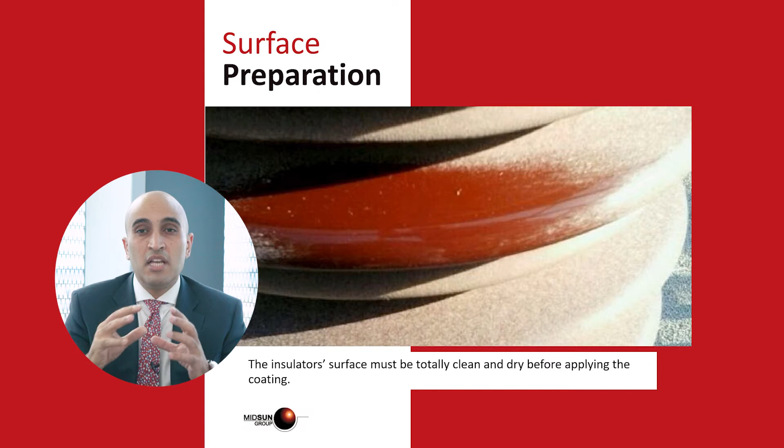The first stage of correct application of RTV coating is the surface preparation. Insulators must be clean and dry. If we have to apply RTV coating, we need to clean the surface of the insulators and make sure that it's 100% dry prior to the application.

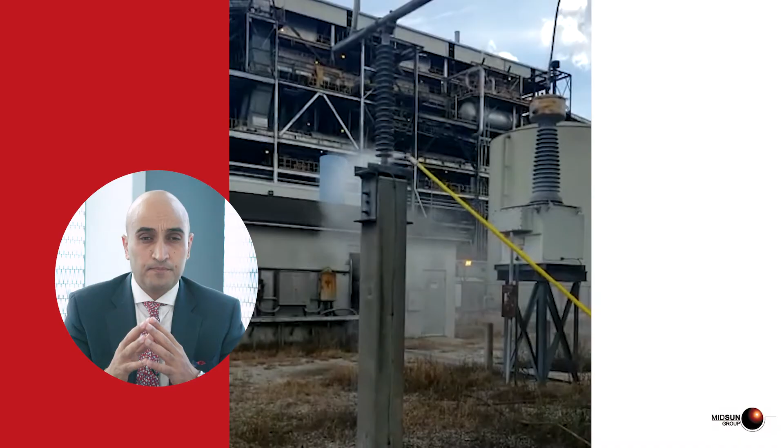For those applications in existing substations, we can use blasting material to remove those contaminants that are very strong. For instance, we can use walnut shell or corn cob or limestone to blast those contaminants before the application of RTV coating. The next stage of the application is mixing or shaking of the coating.

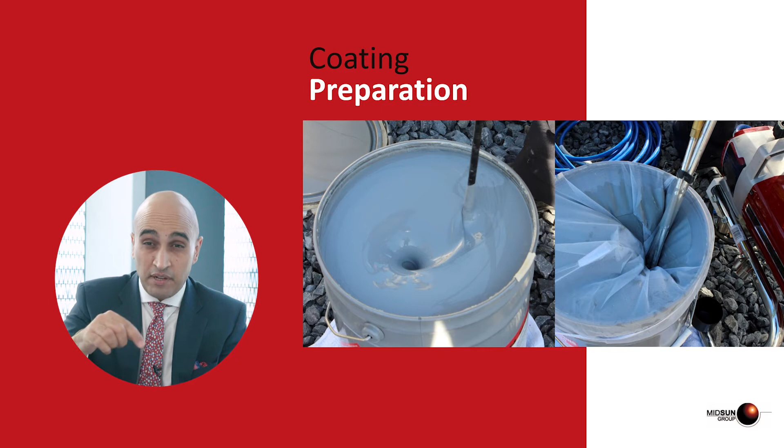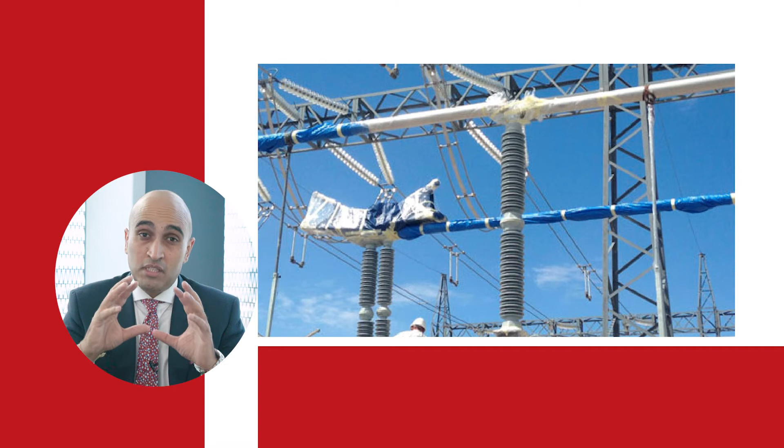Normally the coating in the pails comes with a little bit of solvent, so prior to the application, it's very important to mix it very well, at least 5 to 7 minutes. Then we have to proceed to protect those parts that we don't want to coat. Remember, RTV coating is a highly adherent material, so every time we apply the coating, it will stick. So it's better to protect all those parts that we don't want to be coated with RTV coating.

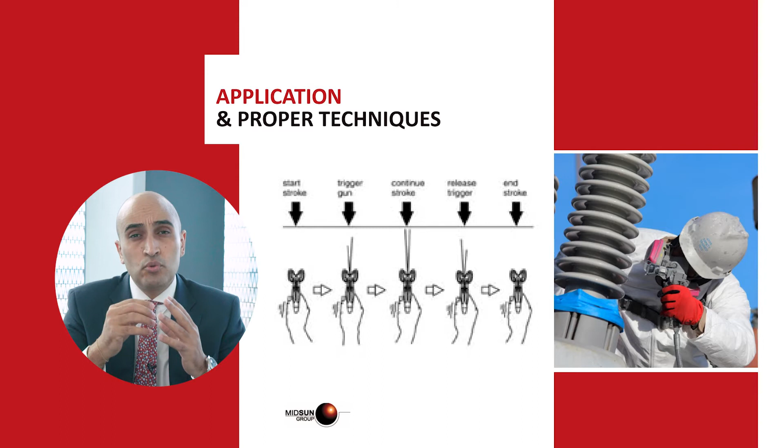And then the application of the RTV coating is like any other paint material. It has to be done smoothly, and for the first layer we have to go very low, so we don't apply much coating, to avoid dripping of the coating. And for cap and pin applications in string, or even for long rod, we always recommend to start from the bottom, okay? Because the bottom part of the insulators is the one that has more creepage distance, so it's the one that needs more RTV coating, more protection.

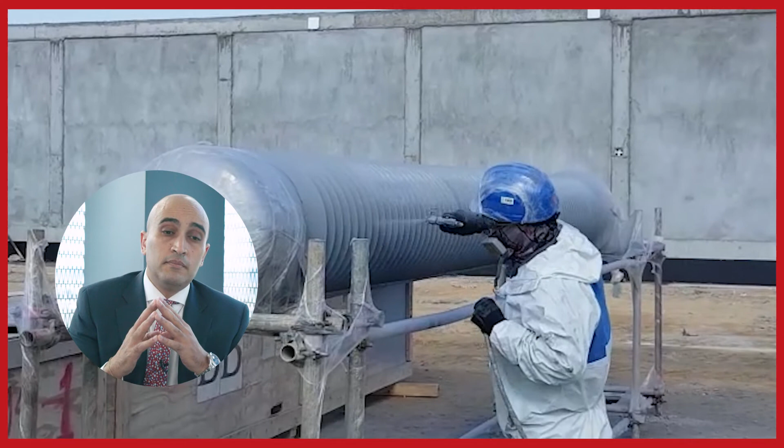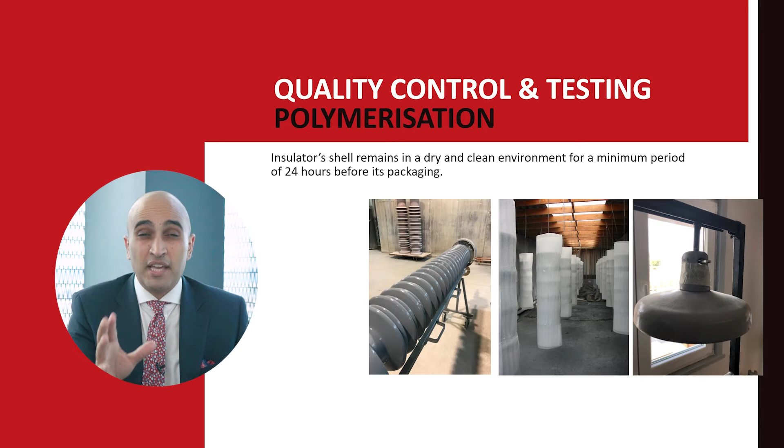If the application is done in-house, meaning for new insulators that will be shipped to a site, we will need to leave the insulators for at least a period of 24 to 48 hours for correct polymerization prior to packaging. This is a really important step to take into consideration.

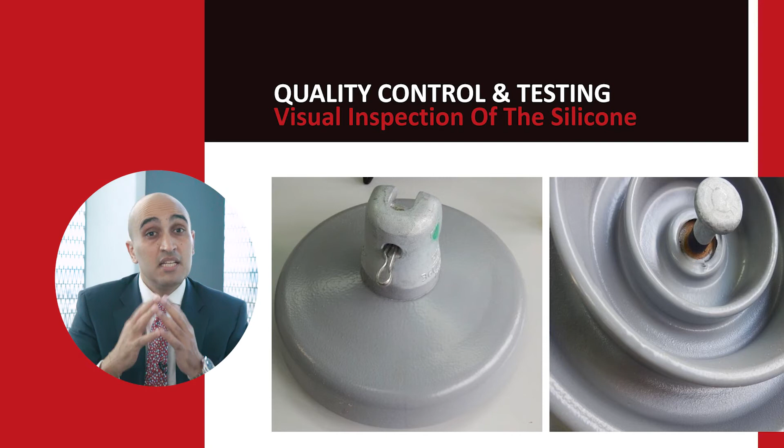After the application of the RTV coating, and when it's cured, we need to proceed to a quality control of the application. The first is visual inspection. We need to make sure that the coating is applied throughout the whole surface of the insulators. There is no white spot, there is no uncoated area. That's an important thing. Second, we need to perform a test randomly on some insulators to make sure that the adherence of the coating to the surface of the insulator is correct.

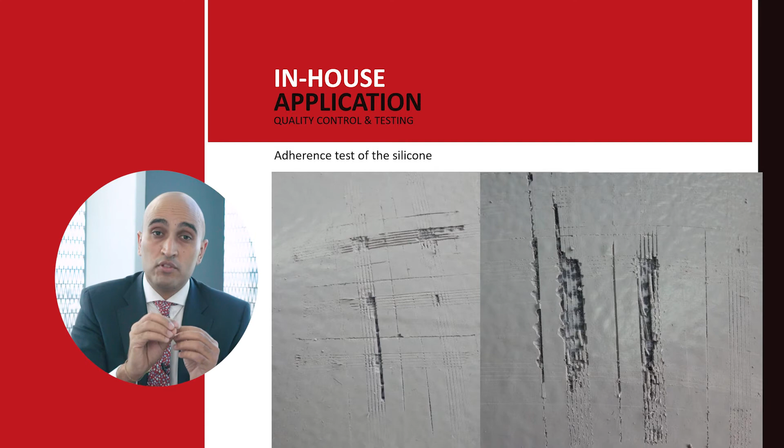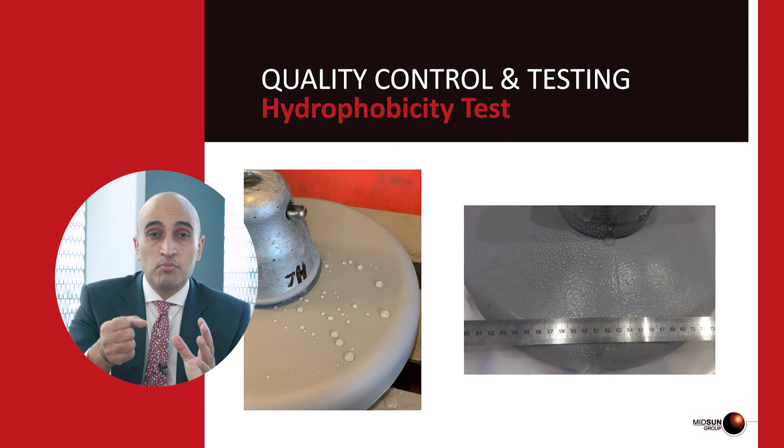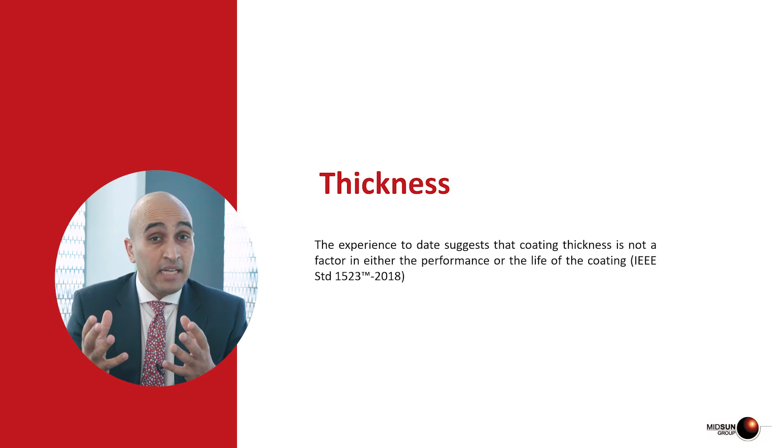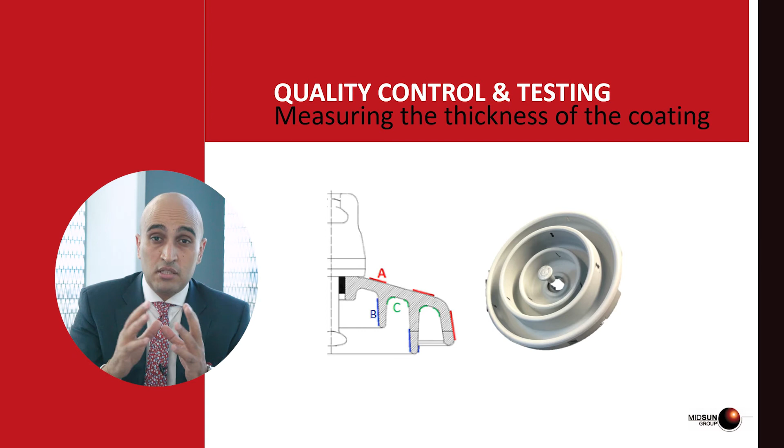Third, we recommend testing the hydrophobicity of the RTV coating. It's a very simple method; we only have to spray water and check the angle of the water droplet on the surface of the insulator. Another feature to take into consideration is the thickness. The IEEE guide of 2018 recommends a thickness between 300 microns and 500 microns. With Midsun RTV coating, you can achieve this thickness with 2 to 3 layers. So we need to check the thickness before packaging the insulators.

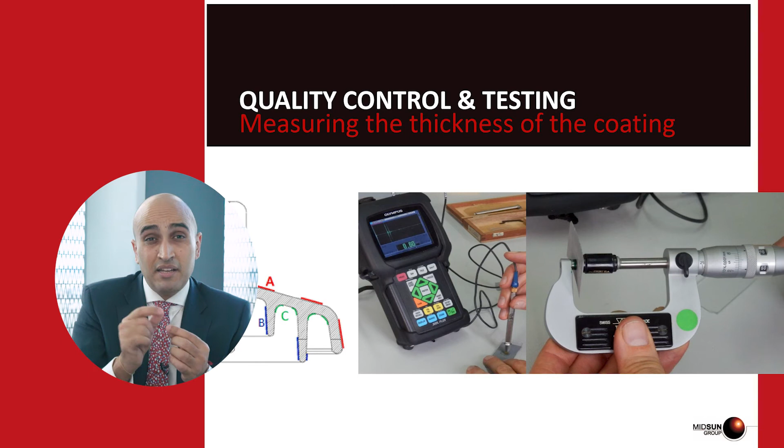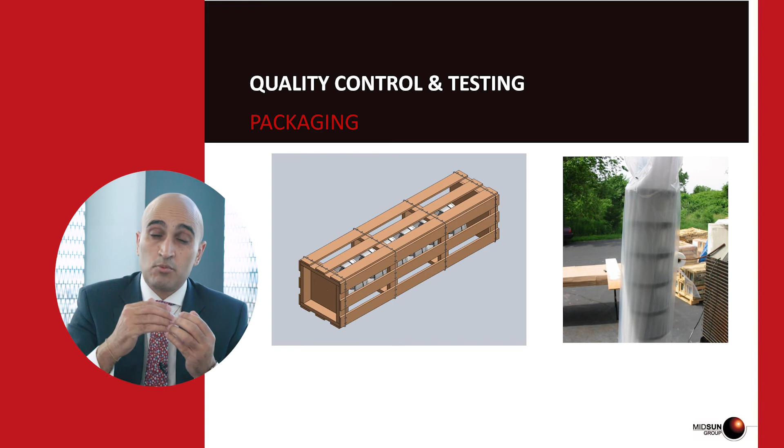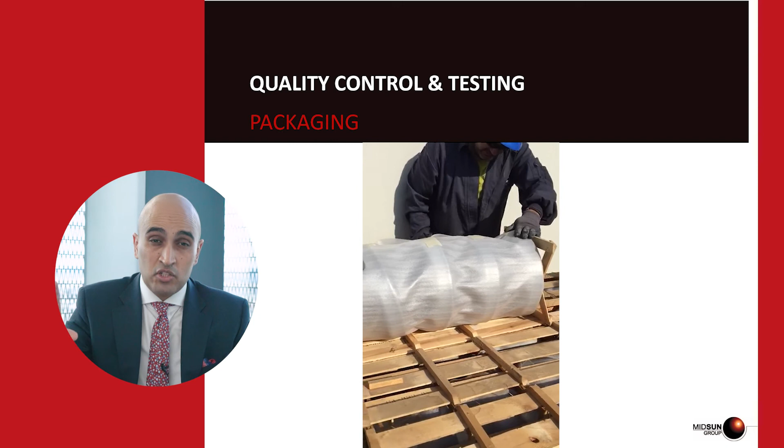Checking the thickness could be done by using ultrasonic equipment or using a simple knife and checking the thickness of the coating with a micrometer. After the quality control and the curing of the insulators, we need to make sure that the packaging we are using is fit for long distance transportation of the insulators. We don't want the insulators to be scratched. However, a small repair kit could be added to the packaging, so once it arrives at its destination, if there are some small touches to be done, they can be done easily on site.

To summarize, a correct application of RTV coating, regardless of the method we choose, spraying, dipping, brush, or automated system, is: 1. Correct surface preparation. The surface of the insulator must be clean and dry. 2. Mixing the coating and making sure that the application is as per the standard. 3. Make sure that we are within the thickness required, between 300 microns and 500 microns.

4. If the insulator has to be packaged and shipped to its destination, it's better to wait a period of 24 hours prior to packaging for correct polymerization or curing. And after the application and the curing, it's important to perform quality control tests such as adherence, hydrophobicity, and thickness.